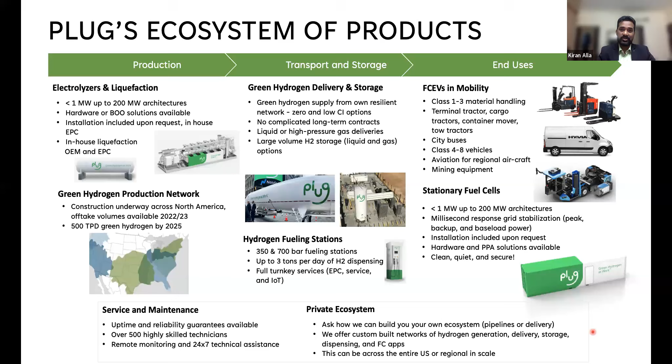In some cases, we have even seen customers wanting to use this fuel cell generated electricity to charge electric vehicles. A lot of people generally think batteries and fuel cells are competing, but actually they are all complementary in a way. That's something very important we need to keep in mind - all technologies will be required for decarbonization, it is not one single solution. So that is something I would like to start with.

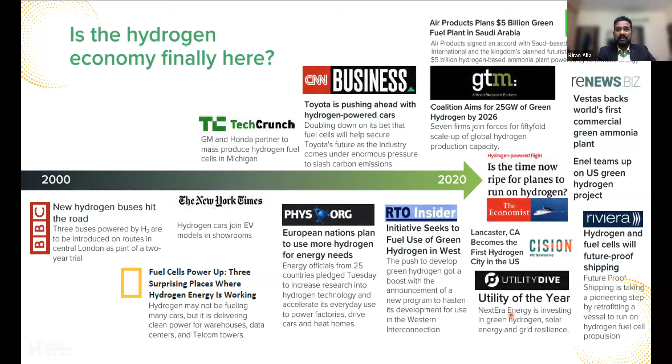If you think about it, hydrogen is nothing new. Hydrogen is already being used by industry across the globe. This is 2017 data - if you update it, this 830 million tons would have grown to about 1,000 million tons of emissions from the hydrogen sector. So about 1,000 million tons of CO2 emissions is the emission from the hydrogen sector right now. If you see emission geographies, after China, US, India, Russia, and Japan, hydrogen is actually in 6th place if you think about it as a country. So any decarbonization of global hydrogen right now is a great opportunity to decarbonize the whole earth. As a sector, it offers a unique opportunity to achieve a large chunk of our decarbonization target by switching over to a new technology.

Now what is the technology? Let's look at the next slide. I'm sure you've come across these various colors of hydrogen - there are more colors than what I have on this slide, I just picked up the simplest ones. Where the source is coal or lignite, it's called brown hydrogen, and the most common one - 95% of current hydrogen - comes from natural gas, which is called gray hydrogen. It uses a technology called steam methane reformation. For the benchmark level, everyone uses 10 kgs of CO2 per kg of hydrogen. So if you're doing 100 million tons of hydrogen, it's equivalent to 1,000 million tons of CO2.

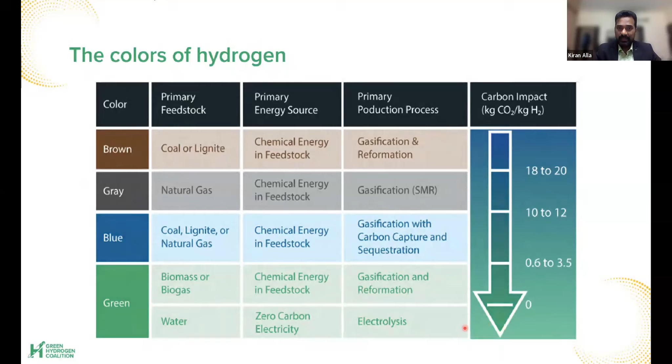Now this is good - the previous slide and this one give us a sense that if we decarbonize gray hydrogen into green hydrogen, it offers a great opportunity. But I will now present something slightly different here.

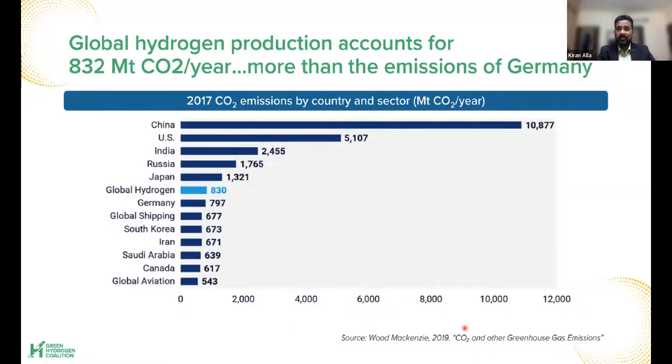But the important thing to understand - I come from the electricity sector, so at least 5 years back I used to think that if we convert all our coal plants into solar and wind, we'll be able to decarbonize the energy sector in a big way. But after I moved to the fuel cells, natural gas and hydrogen space, I realized that electricity is actually supplying only about 20%, not more than that.

The rest of the energy is coming from other sources, particularly coal, oil and natural gas. So this whole energy supply, if it needs to be decarbonized, we need an alternate solution. Electricity could grow, but then what will happen to the rest of it? We can't just focus only on decarbonizing electricity, but we also have to look at other possibilities to decarbonize the energy sector.

This is the same thing from a slightly different perspective. You can see in this slide that in 2009, we were at like 17% electricity share, and in 2020, like 19, maybe we are at 20 right now. It is expected, if left as it is, it will grow to a maximum of 26% by 2050. That means 74% will be from non-electricity sources. So that's a very important thing.

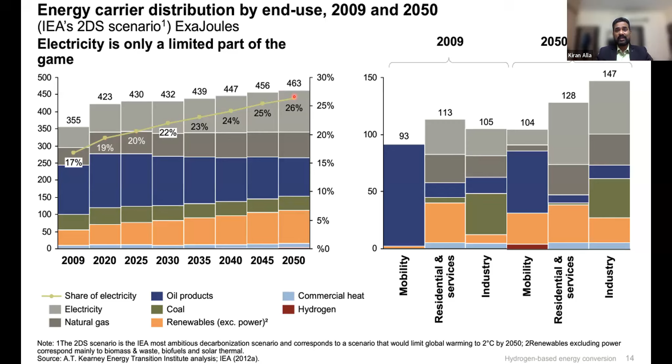Even if we successfully decarbonize electricity, the 74% will still remain not decarbonized. Even with biomass share, a large portion will still remain non-decarbonized. That's a huge challenge that needs to be addressed, and that is where I think hydrogen's role becomes very, very important.

Now, what is the value of hydrogen? If you think about it, I try to see the value of hydrogen purely from a marketing perspective. What is the value? One, as hydrogen adoption increases, unlike some products, the value of hydrogen keeps increasing, because as the availability of hydrogen increases, the adoption increases, and if we crack transmission, it'll further increase hydrogen's value. So the value of hydrogen continuously keeps increasing. That's a very good feature in hydrogen.

Second, currently certain people feel that hydrogen will not solve a lot of problems, and certain people feel that hydrogen can do so many things. But I will be somewhere in the middle, more pragmatic. The real value is somewhere in the middle, and that is something we will start seeing as we adopt more and more hydrogen.

And lastly, we are in the early stage of hydrogen. There is a lot of discussion, but there is no adoption yet. As this discussion converts into adoption, we will definitely see a very high value rapidly emerging. This period could be from now to 2030 and then to 2050, after which it will become part of the system, and then I think it will give us the benefit.

What is the other value of hydrogen? One obviously is decarbonization. Second, it actually allows us to store energy, not just in electricity form, but also in molecular form, not just electrons, but also molecules. So you can actually store it for a longer duration. And it helps us create a resilient energy system. As we know, whenever there is a cyclone or any natural calamity, the first thing that gets hit is the grid supply. So we need some kind of alternate energy system that helps us continue activities. Hydrogen has a lot of value from a resilience perspective as well.

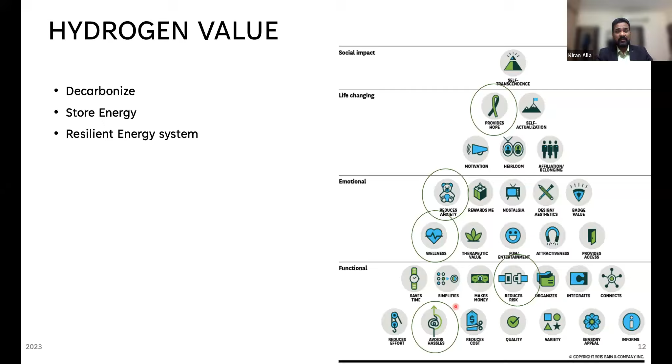Now, another important perspective to think about: fossil fuels versus renewables and green hydrogen. Fossil fuels can be equated to something like hunting, where the energy was readily available - all you had to do was go and get it. But renewables and green hydrogen are more like farming. Here you have to do a lot of work, not just one step. You have to actually do the land work, then the sowing, then ensure it grows, then cut it, and then store and distribute it.

So similarly, the energy value chains, the fossil fuels value chain right now is fairly simple. You have to find out where it is available, extract it, refine it, and supply it. But in renewables, there is one additional step that is coming. We have to produce the energy, and we have to use that energy also to produce the green hydrogen.

So it will be definitely challenging in the initial phase. But I think as we master this, just like we mastered farming, we mastered renewables and green hydrogen, I think we will find that this is far more beneficial than simply using the readily available resources. So we'll have better control, is what my perspective is. I mean, there are some other perspectives.

One of the important things that I feel green hydrogen offers is infinite supply, in the sense that as long as you can scale solar and wind till we reach the maximums of solar and wind, you have the possibility of converting that to hydrogen. So that's a major advantage.

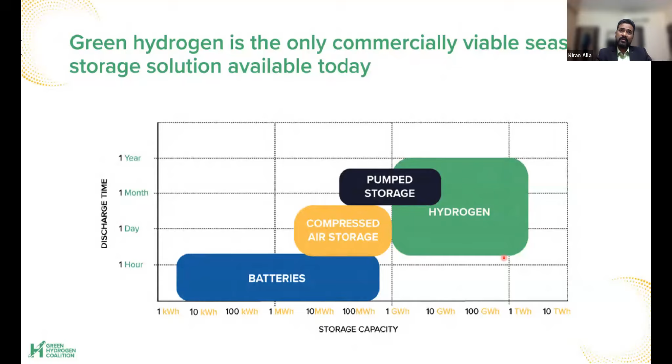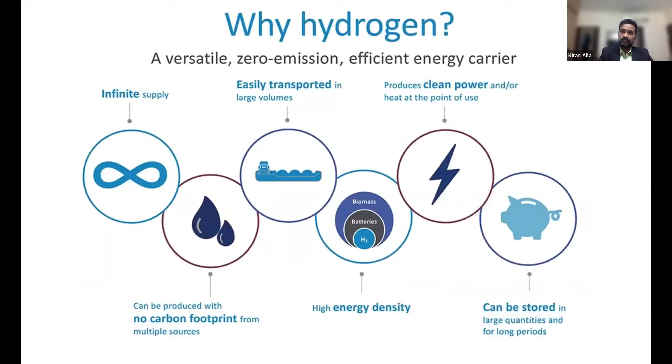Now, so it's again going back to the point that the different energy sources that we use, the electricity and non-electricity sources - how would these two kind of help us and then solve the decarbonization trouble? You can think from this perspective. So this is a Department of Energy, United States graphic, where it shows that electricity grid infrastructure actually has generation, storage, various things, and ultimately the load that it serves.

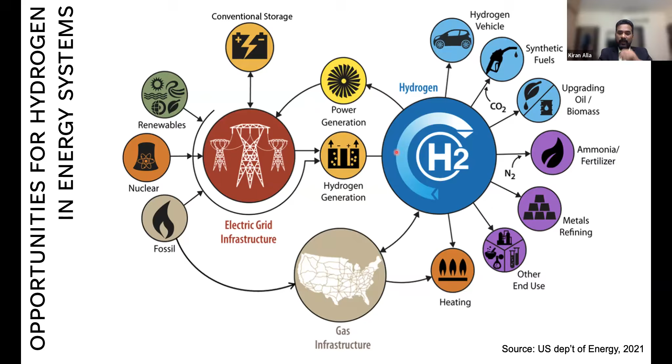Similarly, hydrogen is parallelly working. It actually takes some electricity to produce hydrogen, but it can be used in various applications like vehicles, fuels, ammonia, refining, heating, and all, and also produce electricity. So they both can actually work in a very complementary manner and decarbonize the whole energy sector.

The same thing, if you see in a slightly different way, you have power grid and you have gas grid. So there are even opportunities like methanation or using hydrogen directly, but you can see that the renewable energy sources, fuel cells, they can actually provide two parallel opportunities to decarbonize. So they actually will work very complementarily - that's the main idea behind this.

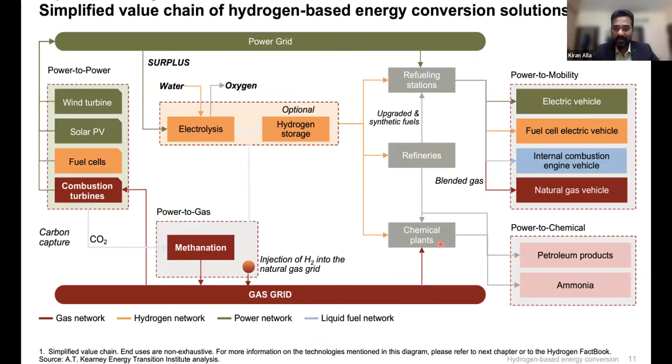Now, in terms of broadly the sectors where hydrogen will find use, you can see that without converting hydrogen, you can actually directly use it in many sectors. And with transformation, either as synthetic fuels or as green ammonia, you can put it in pipeline, store it, and use it in certain sectors. So this is all an evolving sector. There are some use cases where, as I said, we already have 100 million tons of hydrogen already being used in the industry - that obviously can be done without any transformation. But for the rest of it, we have to figure out whether to use hydrogen directly or to use it after converting it to some kind of synthetic fuel or into the green ammonia kind of perspective.

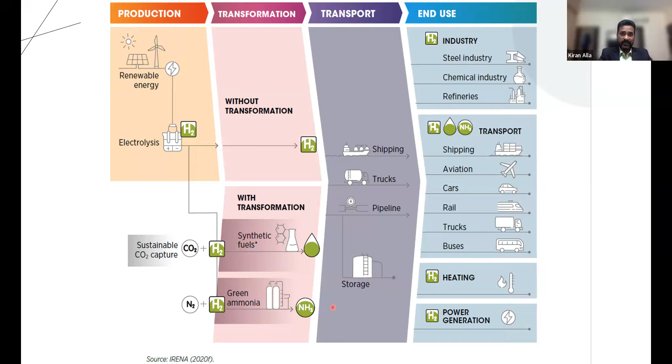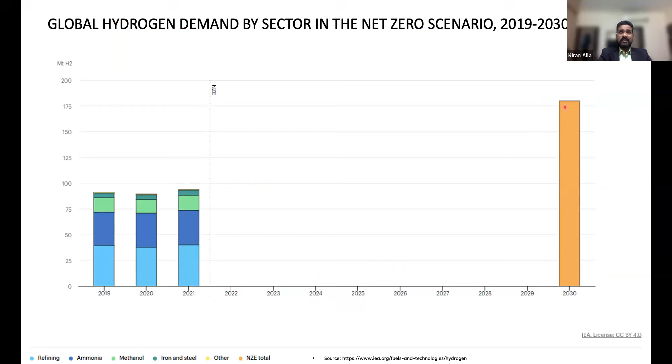Now, this is one of the projections. So right now, the estimates are at like 100 million tons in 2023. And the estimated growth is like 175, 180 million tons by 2030. This is one estimate by IEA. Similarly, another estimate from Deloitte - this report just came out like in the last week - shows that by 2030, we will reach 172 million tons of demand from the green hydrogen space. And you can see the sectors where this demand is going to come from.

So you can see that the majority of demand is coming from industry, iron and steel, other industry, then transport, then power, and a little bit in the building space. As you can see, the building space is very limited, meaning it is going into the bulk sectors rather than the retail sector. That is what the expectation generally is.

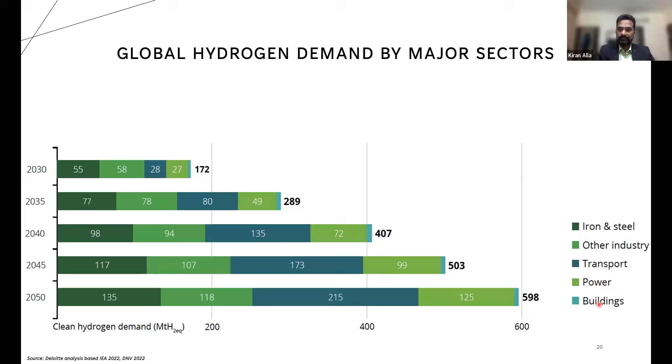So here, hydrogen is already being used, so therefore that is an advantage. All you have to do is change the source - you don't need to do anything else. There is no need to figure out how to transport or store it, because that is already being done currently.

Shipping is another sector. I have personally seen a lot of interest and demand either to use hydrogen or methanol. In fact, in the last week there was a methanol-powered ship launched by the world's largest container ship company, Maersk. They have already committed themselves to methanol, and that ship has already been launched. There are many other ships on order. Similarly, ammonia is being explored by other companies as well. However, the technology is in the initial stages and maturity has to grow, and once it grows, it starts growing quickly.

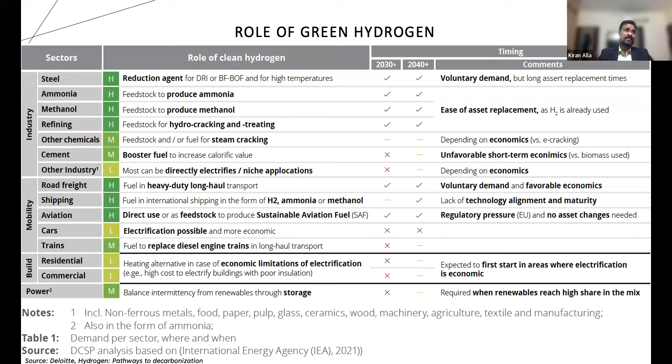Cars, as you can see, have very limited decarbonization opportunity - it's more electrification and more economic to go battery based, I think because the utilization is very low. So that is the reason the projection is very limited for cars. Similarly, in trains, electrification is easier than converting to fuel cells, so there will be some limited adoption where there are challenges. Residential and commercial again have very limited adoption. So therefore, you can see that industry is where maximum hydrogen adoption is going to happen.

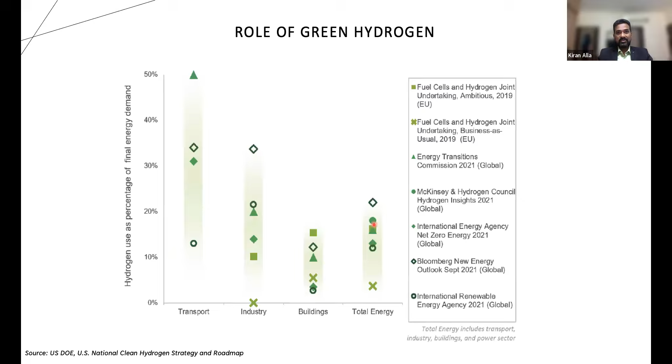This slide indicates that transport has a potential to go up to 50% adoption, industry has an adoption possibility up to 30-35%, and the rest will come from electricity. Buildings will have limited adoption. In total energy share, the possibility of hydrogen can go up to 20%, between 10% to 20%. Even at a 15% energy share for hydrogen, the hydrogen electrolyzer demand is estimated at around 3,000 gigawatts. Right now the installed capacity might be maybe 1 to 2 gigawatts, my estimate - definitely single digit gigawatts at this point if you combine all the electrolyzers in the world. So that is the kind of growth possible in this sector.

Now, another perspective to think about is, what is the willingness to pay? Everyone talks about $1 per kg of hydrogen cost, but that is a long-term target, not an immediate target. So different sectors have different willingness to pay due to different reasons.

For example, the forklift trucks application is one Plug has pioneered, where we have seen the customer gets a lot of benefit in terms of high level of productivity throughout the day. That means there's no discharge of battery and therefore lower output, no space required for chargers, and no additional forklift trucks required which would be charging. Also, I have learned that battery performance goes down dramatically when operated in very low temperature conditions, not only high temperature but also very low temperatures. Fuel cells have better performance in that.

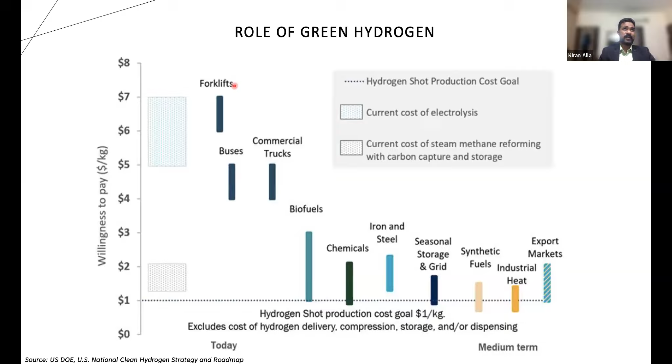So a lot of these material handling applications, converting forklift trucks to hydrogen, has been seeing huge traction, both in the US and continuing to grow in Europe. And we definitely expect that segment to grow even in India.

Now to summarize, what is the positive spiral for hydrogen? The first thing is to achieve scale, so industry shifts to green hydrogen. This will lead to cost reduction, a wider and global supply chain, and we will gain a lot of experience and expertise. Finally, we will be able to achieve standardization. This is one major wheel that will help us reduce the cost.

So once the cost comes down, the next step is about hydrogen transportation in a pipeline. Once we figure out pipeline-based transportation, we will be able to access lower cost, meaning the transportation cost will be insignificant. It will be widely available, not just in main industrial areas, but also in many cities.

Then you can actually co-locate hydrogen production along with renewable energy sources and at the sea. So there will be no water-related concern, no transmission losses, and you can combine multiple RE resources and convert that to hydrogen.

And pipeline also acts as storage. So even if there is interruption or change in production levels, pipeline provides that resiliency, similar to what we see in fossil fuels. Natural gas pipelines act as storage. Similarly, even coal lying in the yard is storage in a way - if there is a lot of rain, you still have coal available. Similarly, hydrogen in the pipeline will be available even if there is some supply disruption for a duration.

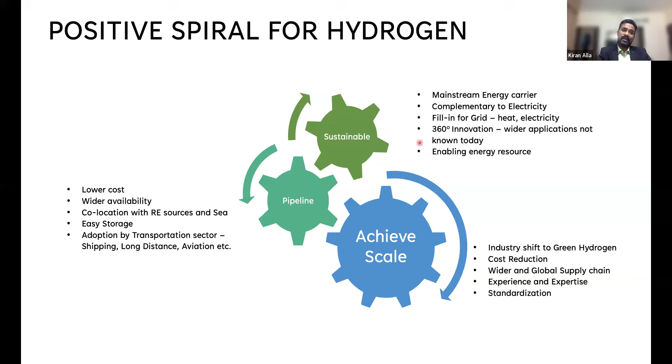And once hydrogen is widely available, as we have seen in the battery sector, we will see many applications that we don't even have an idea about right now to convert into hydrogen-based applications. Finally, it will become an enabling energy resource for the overall growth of humanity and economic development. I think this is what is going to happen. Obviously there will be many challenges, not that it will be a smooth walk - there are many technological challenges that need to be cracked. But I see a path going forward in this direction.

Now, green hydrogen broadly has three technologies. There is biomass based, but I'm not talking about that - I'm talking only about the electrolyzer based ones. There is alkaline electrolyzer, which has been in use for a long time. Similarly, PEM electrolyzer has also been there for a long time, but only at a very small scale. Third, we have solid oxide electrolyzer - this technology has also been around for some time, but was mostly used on the fuel cell side, not as an electrolyzer. So now we are starting to see those electrolyzers as well.

So alkaline electrolyzer uses KOH solution as electrolyte - there is liquid in it. It generally operates at low current density and at atmospheric pressure, though some pressurized alkaline technologies are also coming. But it still uses a liquid electrolyte, which makes it a much bigger footprint compared to PEM electrolyzer. PEM, on the other hand, uses a solid electrolyte, and therefore it is very compact. It doesn't use any liquid electrolyte - you give input of only water and electricity, and output you get hydrogen and oxygen.

Solid oxide is a slightly different variation - it uses steam in place of water. So you have an advantage of utilizing waste heat and reducing the electricity required.

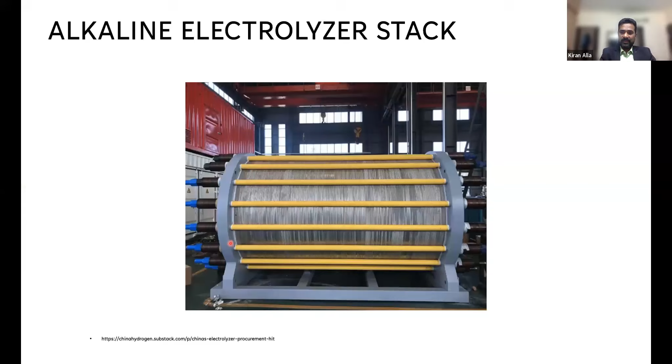Solid oxide, again, I don't have an electrolyzer stack, but this is roughly how it looks like. This is Bloom Energy, my previous employer's pictures. So this is a cell. This cell is put together to create a stack, and the stack you put into a module and make it bigger. So these are the three different technologies currently at least available.

Alkaline is already available. PEM is also available commercially. Solid oxide trials are happening, and we're seeing some traction.

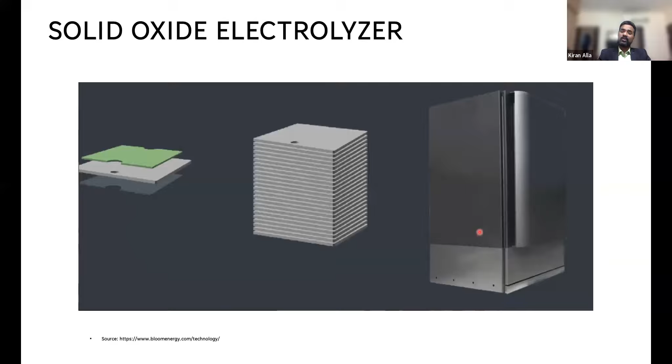The fourth one is anion exchange electrolyzer. Anion exchange is roughly a combination of alkaline plus PEM, trying to get both the good things from alkaline and PEM together. But I think it is at least a couple of years away from commercialization, is what my sense is.

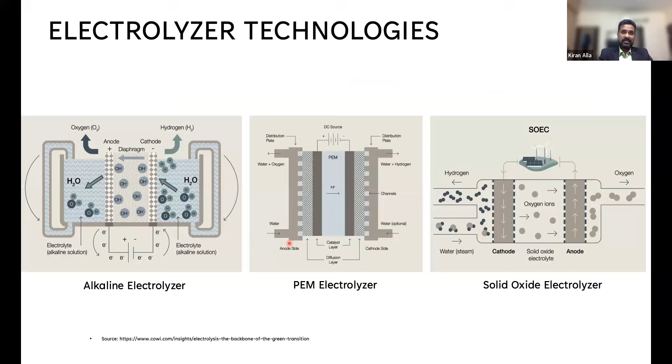Okay, so broadly, if you think about these electrolyzers—this is from a research, a couple of years old, but it will give you a sense—for alkaline, the stack is like 50% of the total cost. PEM, on the other hand, the stack is the most expensive, but because the system is very solid, the other costs are lower. Solid oxide, the stack is again lower cost, but the power electronics is very high, and the balance of plant is very, very high, because it uses thermal energy, so it needs a lot of balance of plant.

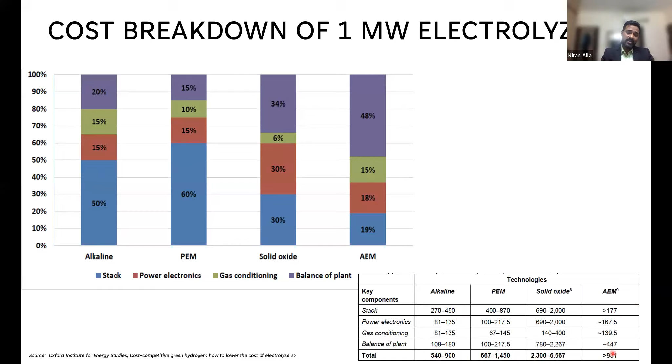Anion exchange, again, the stack is cheaper, but the balance of plant becomes expensive. You can see in the table on the bottom right that alkaline price ranges are anywhere between $540 to $900 per kilowatt. PEM is between $667 to $1450. This depends on the company's maturity—companies which are already ahead and have achieved scale have lower prices, but new companies have prices on the higher side. Solid oxide, as you can see, the lower side is also very high, almost 4 times or more, and the higher side is obviously very high. AEM, you don't have any exact numbers because commercially they are not totally available yet.

So in terms of electrolyzer cost reduction opportunities, there are multiple dimensions. Obviously, because the energy cost is high currently, if energy consumption per kg of hydrogen is reduced, it will help reduce the total cost of hydrogen. It doesn't reduce electrolyzer cost, but actually a higher cost can be absorbed if it is more efficient.

Stack lifetime, if it increases, will reduce the electrolyzer total cost. Similarly, if module and stack size start increasing, the bigger the size, the cost per kilowatt will go down. The operating range is the input operating range—whether the stack can operate at say 30% of input, or can it go up to say 100% or above. The higher the operating range, the better it is in terms of the total cost of hydrogen.

Similarly, for electrolyzers—PEM electrolyzer, for example—everyone talks about the concern of using precious metals. So there is a continuous effort to reduce the use of scarce materials, and that is leading to a reduction in the cost of PEM.

The startup time is very important, because when you start up the electrolyzer, in the initial phase I have noticed that the hydrogen purity may not be up to the mark. So therefore you have to vent a lot of hydrogen before you start using it. So startup time is very important—that will increase production, and when you are combining it with renewables, this feature becomes very, very important.

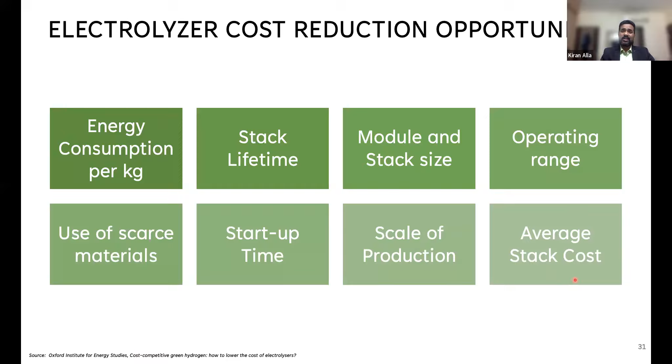More and more factories getting set up and the scale increasing will mean the cost of electrolyzer goes down. The last one is the average stack cost, which is a combination of many things, including what materials are used, what is the size, what is the scale. That ultimately leads to this reduction.

So this is the cost reduction dimension for electrolyzers. Let's go to the other parts of the green hydrogen cost reduction. Now, hydrogen production cost using natural gas is the benchmark price right now, because all the gray hydrogen is produced using natural gas. Last year, natural gas prices increased dramatically.

During that time, none of these numbers would have made sense. They were all almost like 5 times these numbers. So a number here in United States, $1 became almost like $5 at that point, in a short time. May not be so much in the US, but I think Europe had seen a lot of high prices. So close to $2 would have reached even $10 or more. Even in India, we have seen that gas prices even hit $40 per MMBTU.

I think a close proxy to us is China. Our prices of gray hydrogen are close to $2, so it would have hit like $8-9. But now natural gas prices have settled down, so this can be a good proxy.

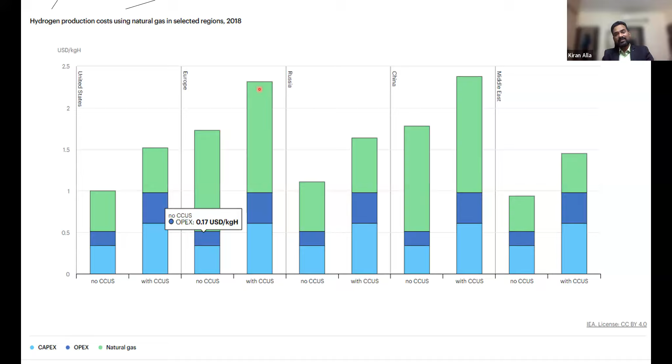But as you can see, when you try to use carbon capture, the price increases by at least roughly about 50% where the price is low, but where the price is high, at least by $1 in this kind of markets. So this is the hope that if carbon capture works, the blue hydrogen could provide an interim solution while the green hydrogen costs actually come down.

Now, if you see, this is the levelized cost of hydrogen production by energy source. Natural gas currently is in the $1 to $2 range, and the expectation is that with carbon capture it will be like $2+. With using coal, the estimate is almost close to between $2 to $3. Coal with carbon capture will slightly increase, not significantly.

With solar right now, it is in the range of anywhere between $3 to almost $8, depending on the cost. But going forward, the expectation is that green hydrogen cost will come down to about 1.2 to 3.2 range. So in the interim, when the green hydrogen costs are coming down from this place to this place, blue hydrogen will provide a little bit of respite to the energy prices.

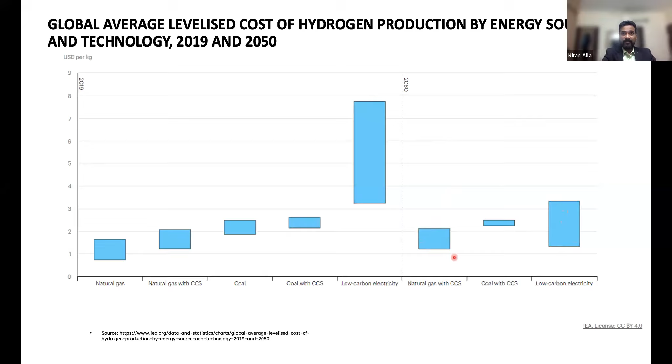If you see this slide, in some cases green hydrogen is already viable, right? Where the cost of solar is low, and you have the right kind of applications, green hydrogen actually starts making sense even now. That is the reason we are seeing a lot of projects happening, but not to the extent of all the announcements moving forward, because there is a certain amount of cost reduction required.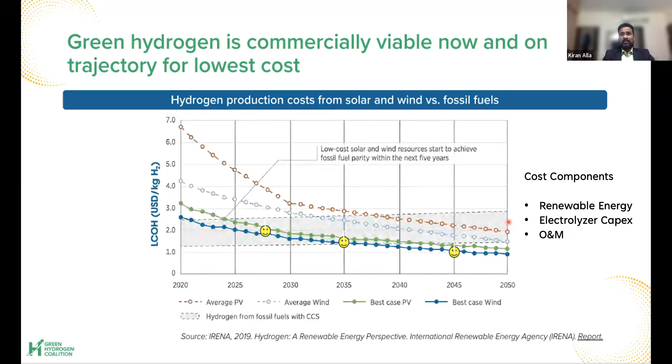So depending on the cost of electricity, we can see that the curves show that the cost can come down from $7 to even close to like $2.4. At this level, by 2030, a lot of different PVs will come into the competitive range. And by 2050, we can see that almost all solar PV based hydrogen generation will be cheaper than the current prices. So this is one of the projections.

Another way to think about it is the more and more electrolyzers get deployed, the cost will start coming down from above 600 to the range of $200 to $100. This is the ultimate goal. So I talked about 3,000 gigawatt, that is somewhere here. When we actually do 3,000 gigawatt installation, we will reach this much lower cost of electrolyzers.

Lastly, just think about what is the impact of renewable energy and what is the impact of electrolyzer. Electrolyzer cost of $1,000, but at $65 per megawatt hour, is $5 per kg. But electrolyzer will help you actually bring it down. If electrolyzer cost goes down by 30-40%, it will bring it down by about $0.50.

So the same thing goes forward. But if the renewable energy goes down from $65 to $20, you can see that $5 will become $3 straight away. So the biggest lever is in renewable energy. And as deployment happens, as we have seen in the previous slide, more electrolyzer deployment means more cost reduction.

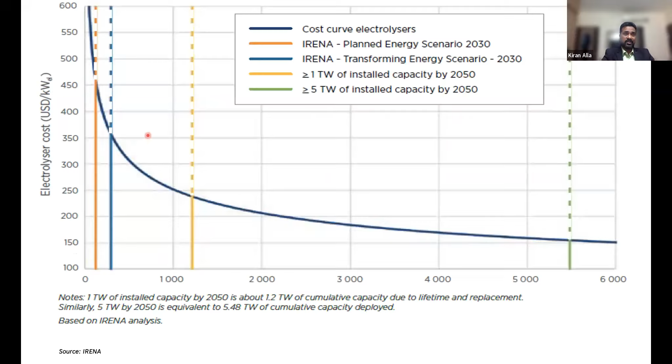So the idea is that we should start deploying and then focus both on renewable energy cost reduction and electrolyzer cost reduction. I'll quickly run through global scenarios in the next 5-10 minutes so that we have some time for Q&A.

United States is giving a direct incentive of up to $3 per kg of hydrogen. And there are tax credits for carbon capture and tax credit for storage. There is also subsidy and support for developing hydrogen hubs in United States. India, we all know that about $2.4 billion has been allocated under the National Hydrogen Mission.

This includes hydrogen production, electrolyzer manufacturing, R&D, and even pilot projects. Recently, for green steel production, Ministry of Steel has got allocation of about, I think, $50 to $60 million. They want to do some pilots, so they will come into this pilot project space. Similarly, we already have a green hydrogen transmission charges waiver, and there is also a renewables banking facility available. I think we have taken a slightly different approach compared to United States.

Similarly, Europe has a multi-fold approach because of multiple countries involved. So they have set up a European Hydrogen Bank. They have a hydrogen procurement - this H2Global - the idea is to procure from other countries and import green hydrogen. And they also have this emission trading system, carbon tax, and they also introduced a carbon border adjustment mechanism so that imports into Europe will not be at a high carbon intensity.

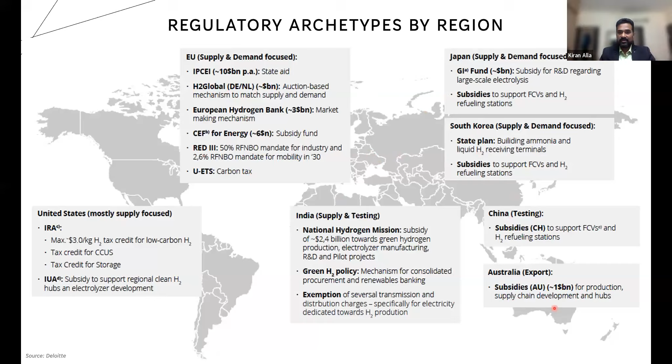If a product is high carbon, they'll have to pay fees. So that means it will make sense to produce in Europe at low carbon intensity. Similarly, Japan and Korea are looking to do their own hydrogen production, but also import hydrogen in a big manner. China, we all know, is doing a lot of stuff. Australia is focused more as an export market. So this is another way to look at what is happening across the world.

In India, I think these are the forces that are making green hydrogen a very important resource for us. We don't have a lot of domestic gas, and the cost of imports is very high. So we spend anywhere between $100 to $120 billion every year to import oil and gas. So therefore, it makes sense to supplement that with green hydrogen.

Second, we have abundant solar and wind resources. So this is something we naturally have. And the benefit of solar and wind is, even if some supply chain disruption happens, solar and wind is within the country, so no one will be able to stop that. So we can take benefit of that. And we have a large domestic market that can help in reducing and reaching lower costs.

And we also have an ambition to be a hydrogen export hub. The renewable energy companies in India have already done a lot of work, and they are looking at export as an opportunity to enter into global markets. Similarly, our energy companies have been exporting refined oil - for them also, they are looking at hydrogen as another way to export energy. So this makes hydrogen a very attractive sector for India, a very huge growth driver for India.

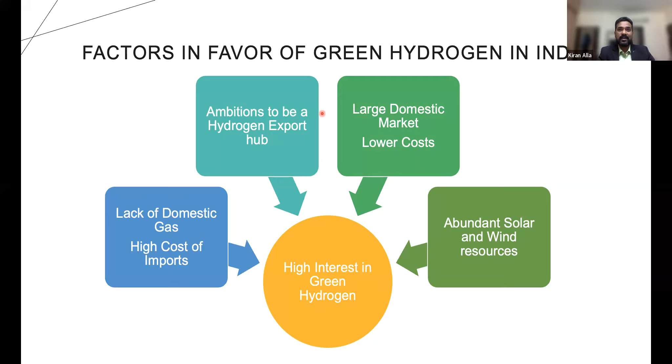So India, as I said, we have high potential. We have very high country level alignment for green hydrogen. And we have seen interest from all players, not one sector - oil and gas, renewable energy, EPC, everyone wants to be in hydrogen. As I said, the export ambition is a key driver.

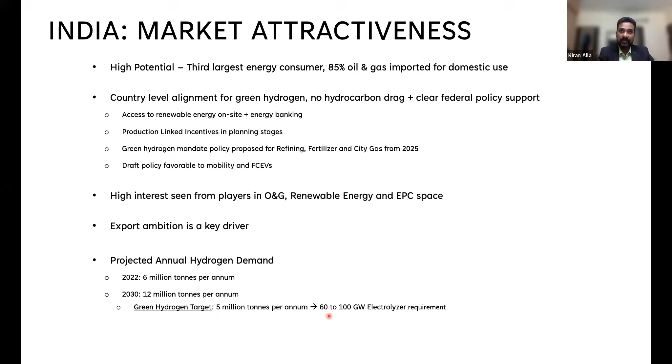So we have a lot of demand already, 6 million tons last year, and we expect it to grow to 12 million. So we have set a target of about 5 million tons per annum. And this translates to about 60 to 100 gigawatt of electrolyzer requirements. So these are some sectors where demand is expected: fertilizer, refining, steel, and methanol.

This is expected demand. And as I said, I talked about the policy already. There are some financial incentives that were mentioned in the draft. I hope some of them will come out and we'll start seeing them happen.

This is the interstate transmission charges waiver policy that I mentioned. So you feed in the solar and wind at the remote locations, and you withdraw here on site, and you have a banking of 30 days, and you can have high electrolyzer utilization, and you can utilize on site for various applications. So this, I feel, can provide a possibility of $2.5 to $3.5 per kg of hydrogen cost in the coming time.

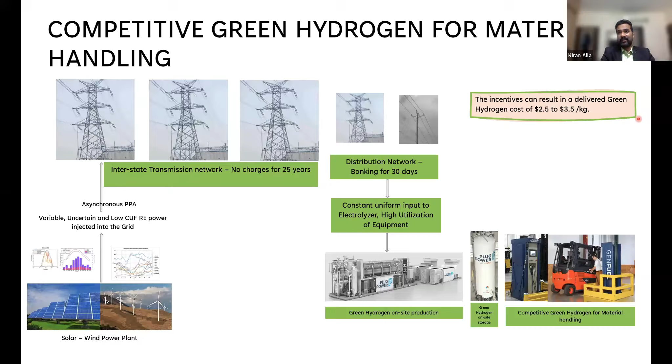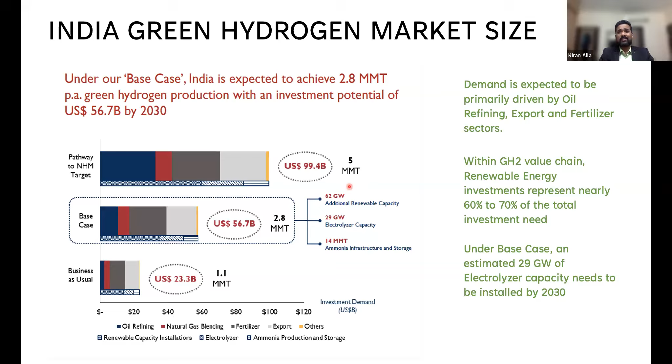This was a recent assessment by USAID SAREP. They estimated that even at business as usual, there is a $23.3 billion investment opportunity, about 1.1 million metric tons per year. But the base case looks at a minimum of 2.8 million metric tons, meaning 62 gigawatts of additional renewable energy capacity, 29 gigawatts of electrolyzer, and at least 14 million tons of ammonia. In all cases, the ambition is 5 million tons, but even at the minimum of the minimum, we are looking at large scale growth. That's the most important thing.

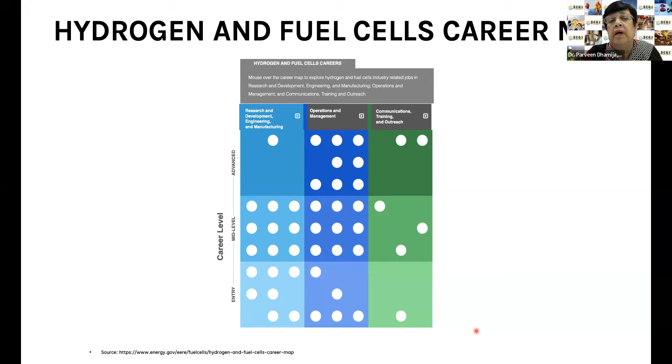This last slide will be of real use to us because we are also developing training modules at various levels, and I think this will be very helpful. The whole presentation was very illustrative. Hydrogen has always figured in the past few years, but it did not get the type of importance or focus which it has been given now. I remember at Spic Science Foundation we did a 25 kilowatt solid polymer fuel cell, and at BHEL R&D we had one phosphoric acid fuel cell, but at that time the companies were not there. The private sector was not in focus. Electrolyzer was never a focus, but with green hydrogen production coming, electrolyzer has become the focus.

I would like to pick up the chat box. I think Mr. Srinivas, Mr. Rohit, could you give the rights to Mr. Srinivas? He had asked a question. I'm not able to find that.

No, thank you Mr. Kiran, I think it's an excellent presentation. It responded to many of the queries in our minds. As a professional in other renewables, I did have a lot of questions, but you clarified many of them. I wrote in the chat box, but one part of the question was covered in your later presentation. I'm a person in a hurry, so I wrote that question on the cost, and you addressed that. But if you want to respond quickly, that's one thing. Another thing I wanted to ask is, on gasification for green hydrogen, what route is Globe taking? Whether extraction of H2 from producer gas, or producing electricity and then using it for electrolysis?

Okay sure, I will answer that question. The most important thing to remember about why green hydrogen figures in almost every scenario is the scalability of green hydrogen and the challenge of carbon capture. At a certain point, for example, when solar and wind became cheaper than coal, everyone said, why use coal when solar and wind are cheaper? The same thing is going to happen with green hydrogen. When green hydrogen becomes cheaper, people will say, why are you extracting carbon and complicating it? So initially there will be blue and green and other colors of hydrogen.